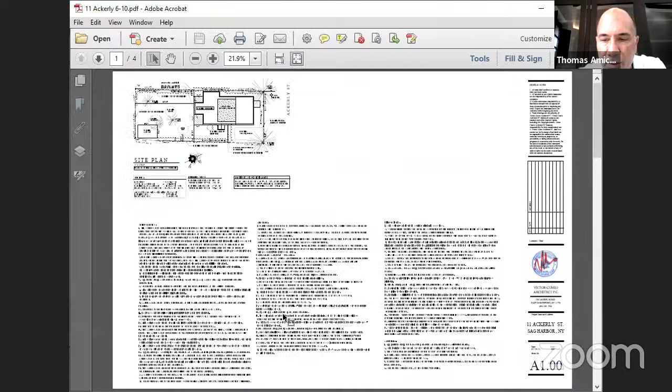There was a site visit last week on Thursday. I think the discussion was about windows. Unfortunately, I could not be there. And we submitted a window schedule, which I think is what that was. Jack, let's see, am I seeing the windows, the actual schedule of windows there?

Can we go through these elevations and just point to us which windows are staying, which are removed, for the record? Sure, so let's start in the front. So if we go to the proposed south elevation, which on this slide is the lower right-hand corner, those 4 windows are staying. They'll be refurbished and staying. And the door also will be refurbished and staying.

If we go to the left, to the north elevation, these are all new, actually. These 3 — the one at the top is part of the dormer, so that doesn't exist at all at this time. The one in the back, the sliding door here — oh, I'm sorry, that's actually Carrie's cursor — is a new door that is moved from where it currently is now. And then the one to the side, to the left side, is also a new window.

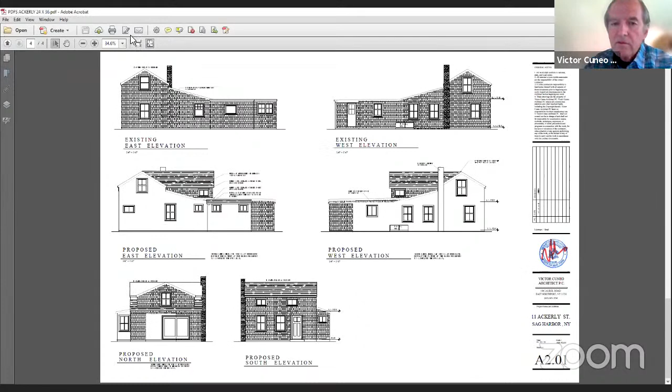Yeah Victor, could you run through that, because you would know better than I, the technicality of it, as far as what they are. Well, it's on the schedule there. Where's the list, can we see it? It's on the floor plan, it's got a list of each window.

So which ones are divided lights? Are they simulated divided lights? What kind of windows are they? They were going to be simulated divided lights with the grill work. They have it so you can put it on the outside and inside of the window. So it looks real, but it's not a real divided light.

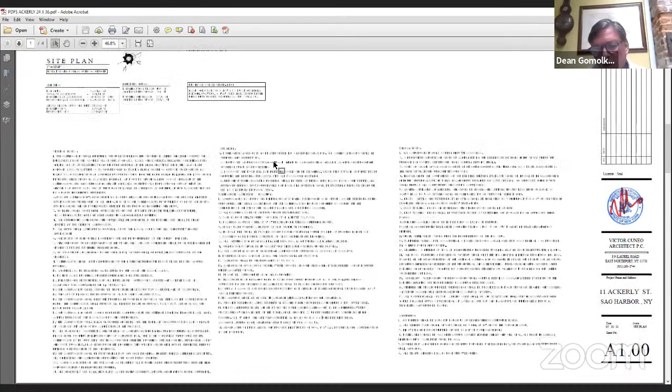And these windows are situated on the property where they're basically behind vegetation and hidden from view, in the back and from the sides, so you can't see anything.

Can we see the site plan, please? Can you just run us through your site plan? Yes. Are you going to bring it up? I'm trying, these are my limitations on the computer, I apologize.

Site plan, all right, we'll do this. I'll have to get back to this, share screen. I apologize, okay, so share screen. Pretty much remaining as is, isn't it, Tom? Yeah it is, but I just want to pull it up so they can see it.

But the thing we were talking about, Vic, is in the... oh, can you all see that? Did I do that properly? Or probably not. No. Of course not. What's that? Did I do it? There it is. Oh, okay, thank you.

New skills. So if you look, Vic, what we're talking about, the top right corner, this existing conifer, as I just mentioned, it's actually growing onto the house, and it's also growing on top of the gas line. We didn't put it in, we were going to leave it, but we didn't put it to take it down.

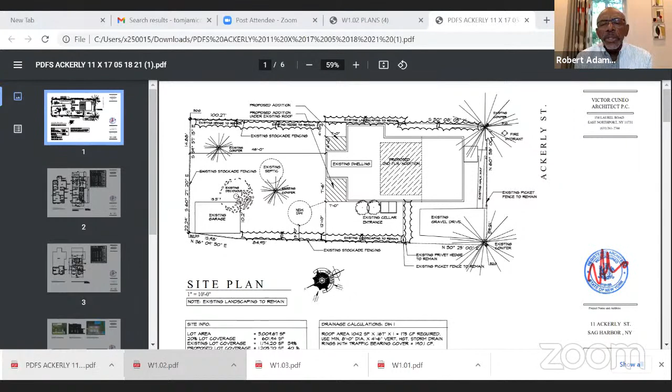Bob, is that door staying? The front door on that prop? Yes, so we'd be in the same place and it'll be refurbished. Okay, fine, thank you, great.

Is there a motion to approve 11 Ackerley as submitted, just the architecture only? I'll make that motion. I'll second that motion. All in favor? Aye. Opposed? Great, thank you very much.

So that was Judith and Brian. Thank you, thank you very much.

Dean, Brian DeSesa's here, so you want to do 14 Vitale. Great, okay, 14 Vitale, please.

Good afternoon, members of the board. My apologies, my calendar still went for 5. I'm Brian DeSesa, attorney for the applicant. We're back here for 14 Vitale Silly.

We were here last meeting where the board approved the house. We had some specifics with respect to landscaping we were looking for, so if I could screen share, I'd like to bring some of those up now. Go ahead, thank you.

What you're seeing on the computer screen right now is the materials designed by Ed Hollander and team. We have a rendering of what the edge of the pool and pool fencing would look like facing toward the water. This is not on the site, but a comparable site which matches the drawings of a similar installation that Mr. Hollander did.

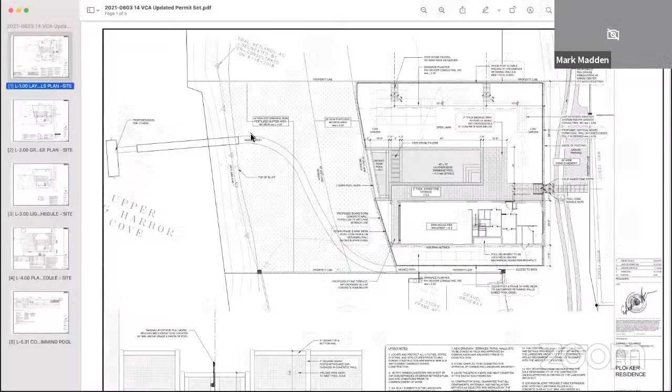And let me go back to the site plan. Hold on, one moment, sorry. We're back on the site plan.

So this is that pool, this is that wall where they would have fencing and deck area. These would be the walls. This would be the sandstone, the gray Madras stones, which would be stepping stones and stairs, which would complement the house. They did add some spot elevations that the terrace, the pool, top of wall would all be at elevation 10. I'm happy to answer any other questions that the board may have.

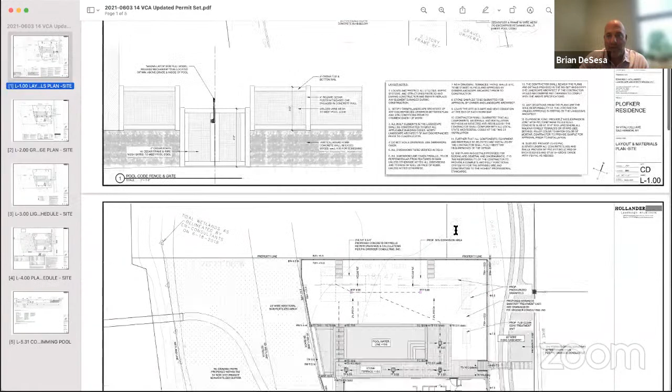Did I see a lighting plan on this one? I'm sorry, I don't believe there's a lighting plan for the house. Is that what we're missing? Is that landscape lighting? Let me just see - yes. Honestly, the lighting notes were on this schedule that I have up on the screen now. Someone really should walk us through the lighting. I'd like to separate the lighting plan and have a landscape representative walk us through the light plan on this, if you don't mind.

That's fine. Could we move forward on the landscape approval, and I would have someone from Mr. Hollander's office here for the landscape lighting specifically? That'd be great. We would like to know what the neighbors got, the impact of this light. I'm sure it's wonderful, but this is coming up a lot now, and it's very important that in these public hearings, everyone knows what's going on, and I would explain it in detail. Happy to make Mr. Hollander or someone from his team available to walk through the lighting plan.

So board members, I asked for some of these things, in particular the grading plan, the heights of the wall, details of the wall. We have some retaining wall details and things of that nature. I think the planting is beautiful - we've got a lot of indigenous things happening, and I think it's spectacular, really. So any comments from the board regarding the landscaping? I think the landscaping, they did a terrific job.

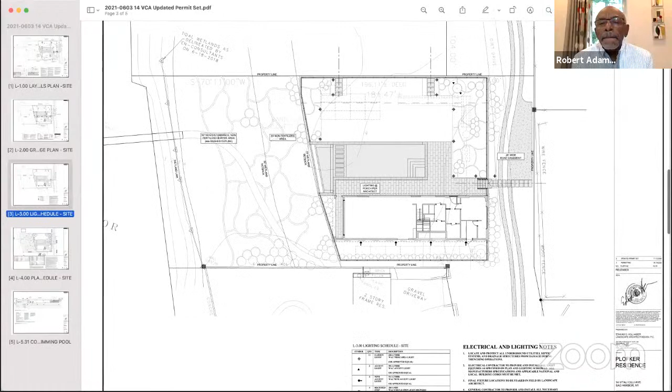Bethany, I would agree. Judith, if you like it, I like it. You can't go wrong with a lot of native plant material. Yeah, I sort of love that sense of place.

So, Mr. DeSesa, if we could just follow up with the lighting and educate the public and us on what's going on with the light intrusion on this site. I can have them do that. I do have the lighting plan, but they would know about light protrusion a little more, so I'm happy to have them at the next meeting, because we might say okay to this design or another.

So are we able to move forward on the landscaping and then separate out the lighting to have them at the next meeting? Sure, that'd be great. I make a motion to approve the landscape plans excluding the landscape lighting sheet from 14 Vitale Silly Avenue. Is there a second?

I'll second. All in favor? Aye. Opposed? Great, thank you. So that was myself and Bethany.

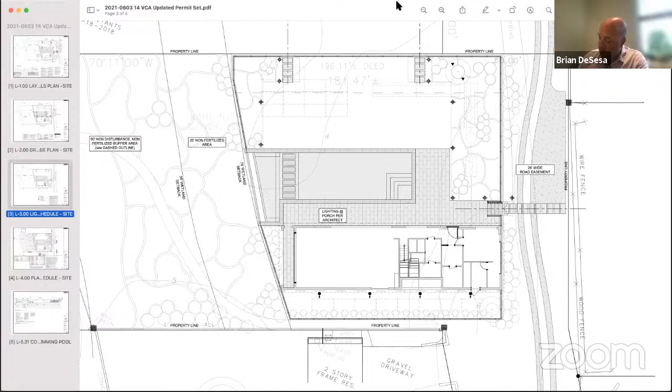Have a good night, everybody. There you go, thank you, Bethany. Right, yeah. Did you say something, Carrie? No, I just said thank you, Bethany.

Okay, great. 14 Rogers Street, please. Yes, good evening, members of the board. Alex Stone here with my wife, Kate, owners of 14 Rogers Street.

Carrie, can I share my screen please? Yes, you can. Is Rick here too? I believe he is. Okay, are you able to see my screen? Yes, we can. Okay, so to remind the board of the house we're talking about, it's this one here on Rogers Street.

Last meeting we spent a bunch of time talking about how I had gone with the board's recommendations to leave the front door in the position it is currently, and the windows and the entire front of the house as it is currently. We also agreed to do the foundation in brick as per Mr. Studenroth's suggestion.

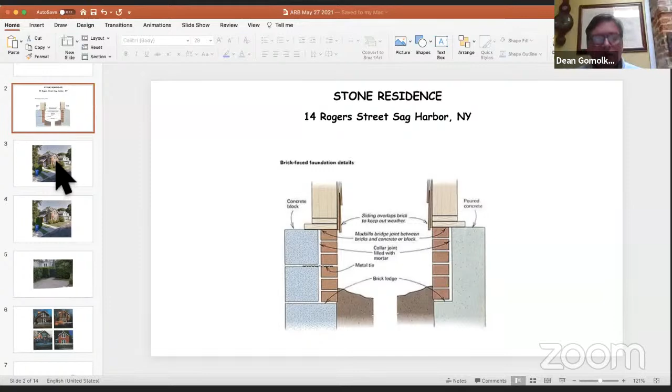Sure. The front of the house, everything you can see from the street, is going to remain as it looks here. We did get approval from the ZBA to lift the house 24 inches, and we're going to be enclosing the porches that are on the side and back of the house.

You can't really see much back there. This is really the only angle from the street where you can see even just a sliver of those back porches. I did a poor photoshopping job here showing where our hedge is going to go at the back of the parking court. Our parking court will have a hedge and a little gate like that eventually, so you won't really see much in the back.

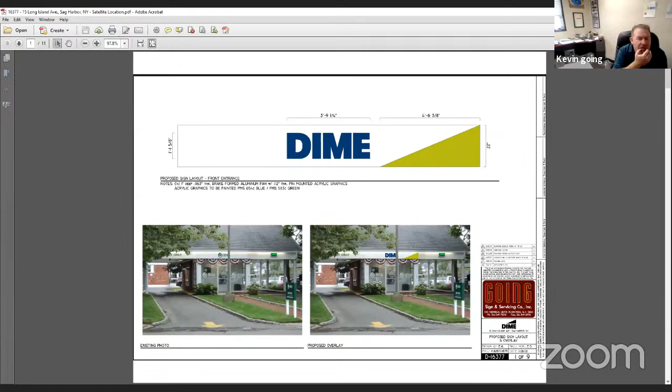There, so that's it, go back. There it goes. That was a minute ago, right there. There you go.

So it's going to be this, but it's the exact same size, correct? Same size, we're not changing the size at all.

Is there a motion to approve 15 Long Island Avenue as submitted tonight? I approve 15 Long Island Avenue as submitted tonight. I need a second. I'll second that. So that's Bob and myself, all in favor? Aye. Opposed? Great, thank you, have a great night.

Okay, 11 Carver Street please. 11 Carver? Yes, great. State your name for the record and tell us about your project.

Mark, are you there, can you hear me? Hi Mark, hi, sorry about that. Yes, we're adding a pool and pool house garage on the back to 11 Carver. This is our third time here.

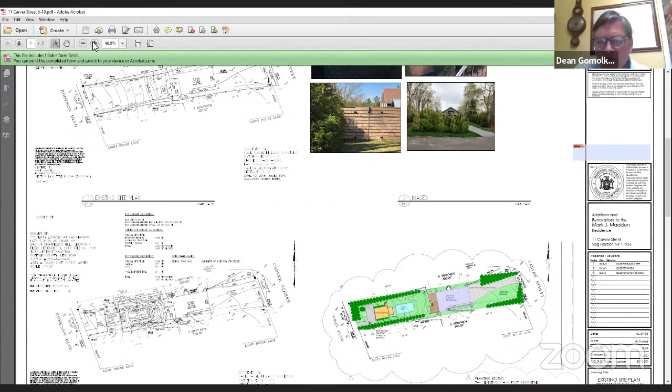I'm bringing it up right now. There you go, do you see it? Yeah, can you zoom in so we can see what's going on? I would love to. There you go. Thanks, Carrie. You're welcome.

So if you can just enlighten us and explain, we were asking about, is there a plant schedule? Yeah, it's provided, everything, all the perimeters are already in place. All the perimeter plants are already in place. It was along the garage.

We asked for you to call out what plants those were here. I see green, and then we put in, somewhere he put in, we were going to put in 4-foot boxwoods. Yeah, they're on the bottom, 15 on each side, right here, it's proposed planting legend. Existing here and existing here, and then proposed 4-foot boxwood.

And then the grading with all the water going into the pool, is there, did you, did someone take that on and put something in? Right here I believe he put, and I'm sorry because I'm pinch hitting for my architect, but he put in something right here, I believe.

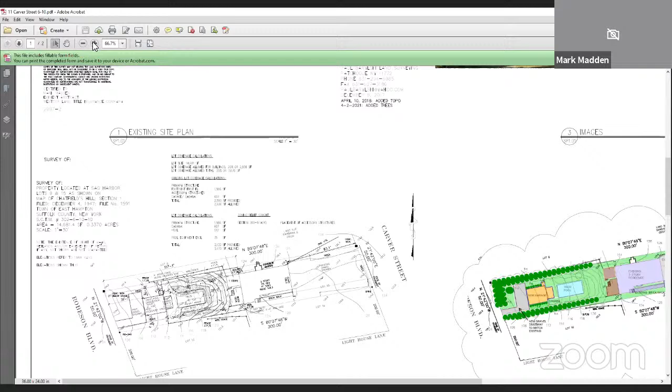Carrie, is that what we did, to put in a drain? To catch the runoff, I'm trying to zoom in for you to see it. Sorry. If you see right here, I believe it says new dry well. Yeah, yeah, correct, right there.

Okay, I'll make a comment that the building inspector will do this anyway. We'll make sure that these takeoffs all correspond with what's required to make this grading work. I will make a comment on the application that the building inspector will review your calculations.

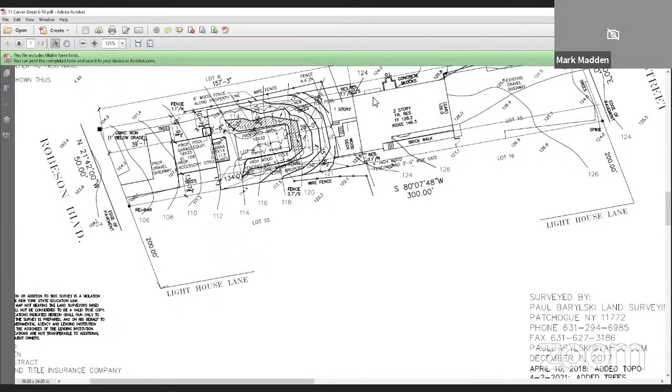Okay, perfect, completeness, thank you. Is there a motion to approve 11 Carver Street as submitted? I'll make that motion. Is there a second? Second. All in favor? Aye. That's myself and Judith, with the comment that the grading and drainage will be reviewed by the building inspector.

Thank you, folks. Thank you. Good night, Mark. Good night.

6 Hampton Street. 46 Hampton Street.

So, Elizabeth, I do not see her. Okay, so this is a beautiful old house, has a lot of detailing like the wharf shop in town. So if we could probably draft up a resolution between you and Zach on how to repair the woodworking on that, and then we could probably vote on that next week.

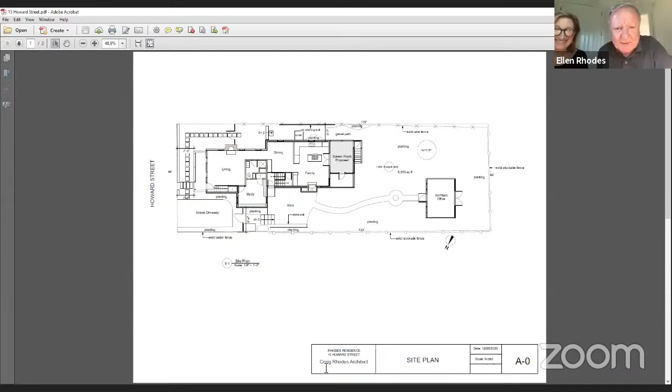I'm Craig Rhodes, and this is my wife, Ellen. We've lived in the house since 1993, and we've put a couple of additions on it and gone through all the approvals and all that.

We have this deck, and we've always wanted to be able to sit out there in the summer evenings, and we love the idea of a screen porch. So it really seemed to be a logical addition to the back of the house. If you've been to the property, you'd realize that you can't see it from any other property. It's pretty much secluded back there, and it's just a modest size porch, and we would love to be able to do it. I did trespass today, I thought it was quite beautiful back there.

Thanks. Any comments from the board? Bethany, I think it's very appropriate and I'm good with it. Bob, I think it's a great idea. Judith, I think it's wonderful. Is there a motion to approve 15 Howard Street as presented?

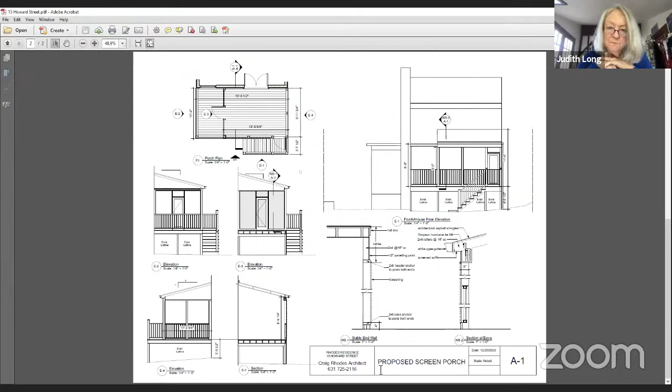I'll make that motion. Is there a second? I'll make that second. That's Judith and myself. All in favor? Aye. Opposed? All right.

155 Main Street, please. Ryland's here. Hi, Ryland Hilbert, just the turn it off. Okay, new occupant of 155 Main Street.

Gary. Did we lose our applicant? No, I'm still here. There you are.

Okay, tell us what you're proposing, please.

I'm proposing replacing the former Corcoran signage with 3 new signs. If you scroll up, there was formerly a larger sign, that's the current pin lettering. It's going to be metal pin lettering with my logo. There was an awning to the left of the building that was taken down by the landlord, and there used to be a Corcoran logo there. For the front, I'm going to be putting the pin lettering in the metal.

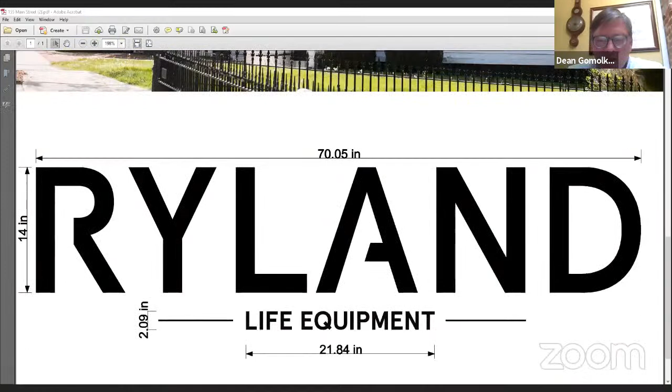Okay, so we're just talking about proposed stuff at the moment. So there's this one, and where the sign is proposed to be in the lawn - can we see that? It's just down a little bit more. Or is it in a different file, Carrie? Yeah, let me grab it. Okay, that was on one thread.

What is a life equipment? Get a free commercial here. We prepare men for everything that life throws at them. It's our little slogan.

So the lawn one, it's still actually there, the Corcoran sign - I guess the landlord just took down the letters. It was much bigger, I'd have to measure, I think it was like 6 feet by 3 or 4 feet. We're going to reduce it to 3 feet by 3 feet square, which actually my current store in the background of the photo, once it's pulled up, you can see is the same spec, like 36 by 36.

I'm trying to pull it up - when you sent it to me back in the beginning of May, it's expired. I'm just going to re-forward it to you. I don't know if I could share it, I'm on my iPad. Just resend it, re-forward me the thing someone sent yesterday. Hold on, oh there we go, found it, you got it.

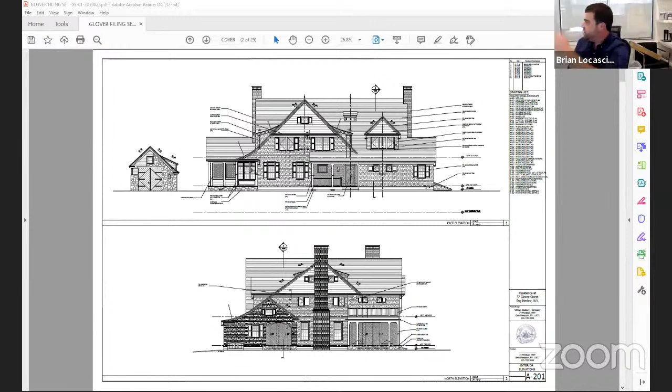You come in. Hold on, let me just try this again here. Sometimes it gets frozen. Are you looking at A202 now? Yes, yes. Okay, all right. So,

All right, so you've only seen really the front elevations. So the door on the rear, this is the second story deck. This is the copper roofing, the stone foundation. And then here is the pool house outdoor shower, which contain the stones, cedar siding.

And then the garage, which is part stone, part cedar. This is kind of give you an image of what it would look like. Garage door. This will be the color of the cedar shingles.

This is the simply white for the proposed trim and cedar lap siding. This is the anchor gray, which we're proposing for the shutters and the front Dutch door. And this is the horizon, which will be for the window sashes.

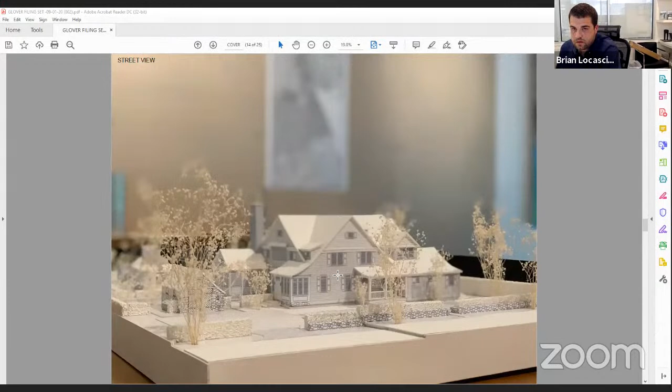Again, just another idea of what it will look like. And here's a 3D model to give you an idea of how it would look overall. The house, garage, pool house. Again, from the street. This would be from the north view.

And do you have any information regarding houses of a similar square footage in the area? I do not on hand, but I can certainly get that.

And there are several quite large houses on Glover Street. I don't think this is by any means out of context. It's on Glover. We'd like that to be fleshed out on a street plan showing some comparable sizes.

I was making notes. Now, do you have some quick detail sheets to run through for us? And then I'll just get some general comments. Yeah, do you want to turn to landscape, or do you want detail sheets for the structure? Yeah, for the structure. Okay.

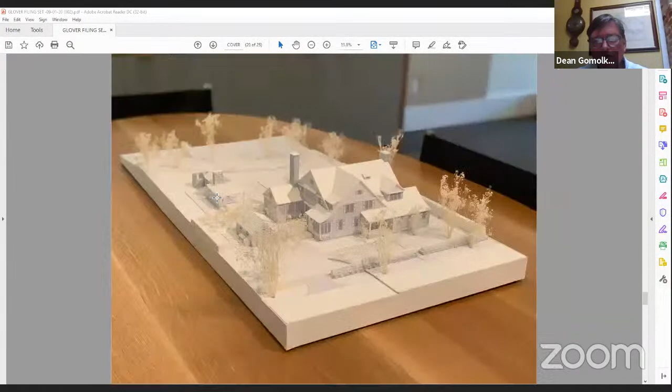So I have a window schedule, all Marvin windows. I don't know if you can see. Do you have window details, soffit details, eave detail, chimney detail, something?

So we'll just start with the magnitude of this structure, and we do have, we provided a full building department plan set. I can pull that up.

At the end of the day, we're going to have to go—if we vote tonight, we're voting to go to a public hearing, correct? Correct. So,

This would be great to get some of that context from those drawings and discuss it with the board members, but just from what we were looking at now, we can get a good sense of how the board is feeling towards the massing of this structure. We have Bill Beaton, the architect here. He might be able to answer a lot of those questions directly, if you do want to direct some questions to flush some of that out now.

I believe he is here and was prepared to assist in the presentation tonight. Great. Judith, how do you feel about, on the whole, the general direction of the style of architecture here and the size of the massing? As far as the style goes, I think it's fine, but I do have some problems with the size and the massing.

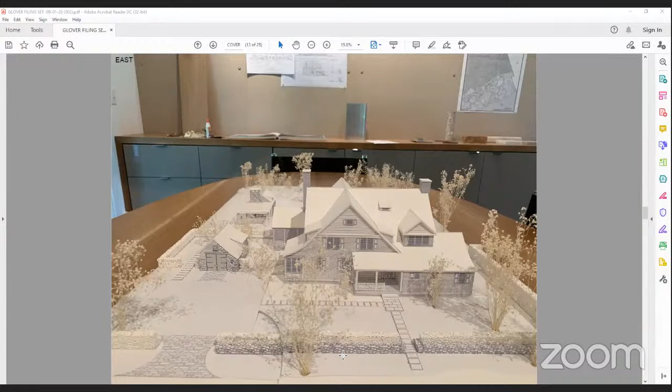And so it just seems like it belongs in another state, perhaps, where there are lots of stones. So I'm a little bothered by the streetscape because this will be so much bigger than its neighbors. And the other thing I'd say is all this stonework, not only on the house, but I think I see a very large stone wall.

Noted. Bethany? I think it's a handsome design. I really like the house. And I would be curious about the houses around it, you know, the sizes.

Because I really do like it, and I actually like the stone on the pool house. When I looked at what we're looking at right now, I kind of had that feeling about the stone wall, like you, Judith. But overall, I think it's quite nice looking.

To Judith's point about the stone, there are examples of walls that incorporate old ballast stones from all over the place. But I think, to her point, the whole facade of that garage looks like it's from somewhere else. So I think you could probably crank back that detail a bit to work with the sense of Sag Harbor, since it feels more like upstate New York or Maine. Val Florio?

Val? Well, I think it's interesting because a historian might say this house is sort of a change in direction from being non-historic, so it won't get confused with other houses on the street.

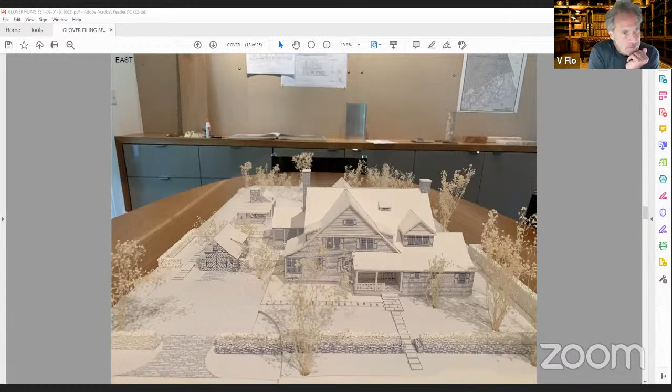Maybe, I'm not sure if there's a rendering or something, but as it relates to the streetscape, it would be helpful to see how it works with the other two houses side by side.

Bob Adams? I think it's rather large for Sag Harbor, and I agree with what Val just said.

I think a rendering would really do this justice, and to help us work through the square footage of this house and its size, we're going to need an aerial plan showing the different houses in the vicinity and their square footage, and how it compares to this one. And then, it's super important to understand how this site is being manipulated grade-wise, and why there are walls, and how the elevations are working.

And very importantly, what's going on with this is another plan with a lot of landscape lighting. I'd like to know what the wattages are and what the concept is with the lighting. A lighting plan was presented with the...

Yeah, I'd like someone to walk us through and say why they're using so many lights on this site. I'd like that to be out in the open, and explain what's going on with the walls, the elevations of this property, why it's being raised, and we need someone to walk us through the landscape.

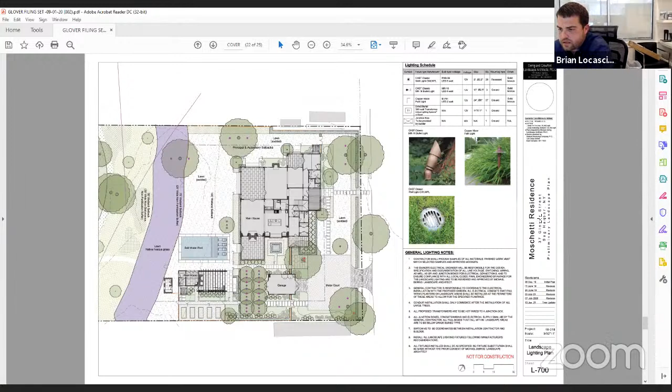So to move this forward, I think someone from the site team needs to be really clear and ready to make adjustments at the public hearing, possibly regarding how much light is being blasted on the site, how the grades are being manipulated, and how it's going to look. And that wall - it's a simple thing, we just need to know what's happening here.

And I'm happy to vote for a public hearing, but I think you're getting a positive reaction, with the sticking point being the overuse of the stone cladding and the size of this structure. And it's a matter of convincing us that the neighboring properties are of a similar size in some way, and how this is working into the street.

So with that, board, would you be okay if I go to a vote to set a public hearing for this project? And it would be very important at the public hearing that the architect walks us through these simple things - the details for the chimneys, what's going on around the windows, the doors, the soffit - just some stuff that, since we're here as the aesthetic element, we just need to be provided with that information.

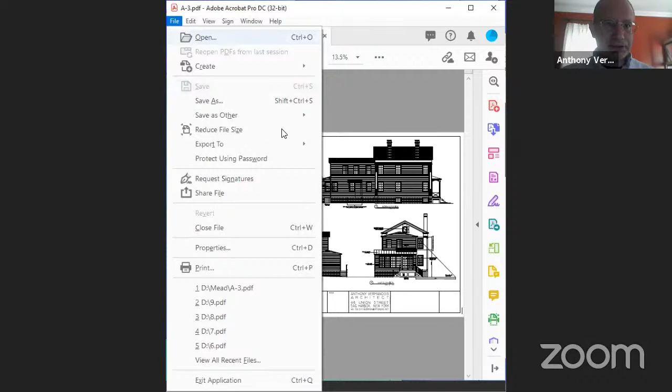Okay, I don't know if you can see that here. Let's try to get this. Oh yeah, I can see. The right way. Well, I can see the door, like you said. Oh no, maybe that's how it's going to look. So what we have here is, this here is the existing side. Let me try to zoom in here.

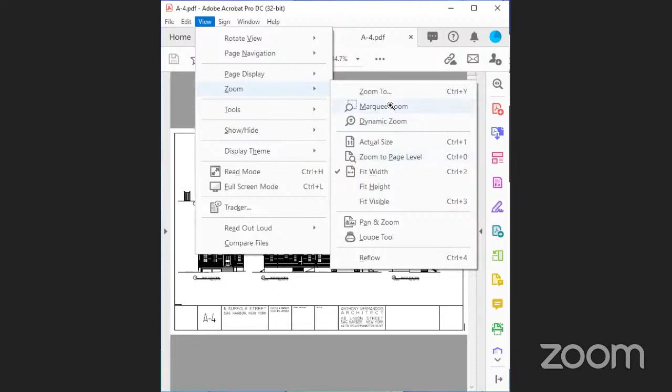View. Go to marquee, I think. Yeah, yeah, and then you can. There we go, there you go. Thanks, okay, that should be a little clearer.

All right, so here, here you've got the existing side. You can see how there's these two roofs that are different heights. There's this side door, this stoop, and this little shed thingy-majig. So what we're doing is just kind of regularizing this. This door goes away, the shed thing goes away, the stoop goes away. Two new windows here, a new little basement entry there, and then this roof just becomes evened out.

And then you can see on the rear elevation, this is the existing, so this kind of funny change in height here. This is that sort of funny shed thingamajig, the existing stoop there that we're taking away. So we're just regularizing this, so it'll just be one roof line and a stoop going down.

It's good, yeah, all makes sense. We're picking up the existing details and just implementing them around. This is a very nice application.

Comments, Zach? Oh, I think it's perfectly fine. All the real work is on the back, which is all newer construction anyway, and it's obviously out of sight from the street. Judith? Yes, it's an improvement by far. Bob? It looks good to me, it's fine. Val? Yeah, very nice. And Bethany? I agree. Okay, great, I think that this is a great addition. I mean, this is working with the existing architecture.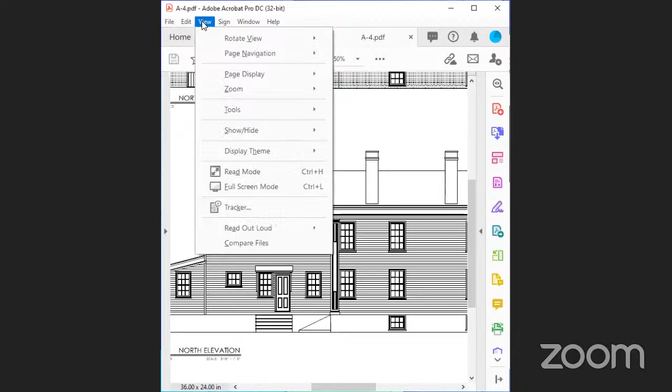So, if you may recall, about I think this was back in December, we did a discussion item for this project. I think things just got kind of caught up with some of the upheavals in the building department and stuff, so we had to kind of update everything to meet the new checklist and whatnot. And then we finally got to have yesterday a site visit with me and Zach over at the property, so he's now seen it.

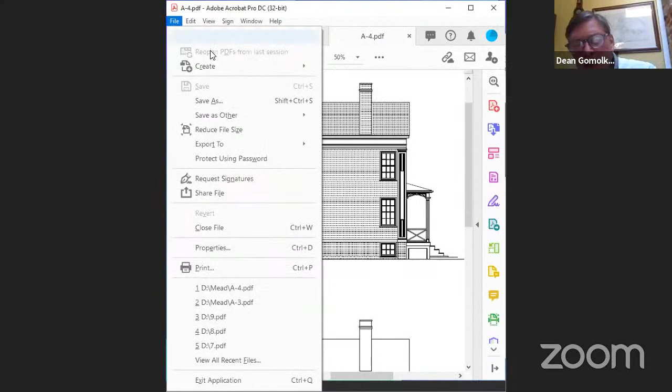So Anthony, can we get the right image up? And Zach, I'm gonna try to do that right now. Working on it. Zach, can you tell us about this site?

Well, it's a lovely small scaled craftsman type cottage. It's one story. It's a little unusual, it's only four bays wide, which will come up later in the discussion. Seems to be pretty much intact as built, and this is an application to enlarge it to the rear.

And Anthony can speak for himself, but I think that what he's going to present will show that he's scaling that addition appropriately. It steps down from the existing house and it steps in on either side. So I think he's done a good job. As I said, the house is small in scale to begin with, so that's always a challenge, but I think he's done a good job with that.

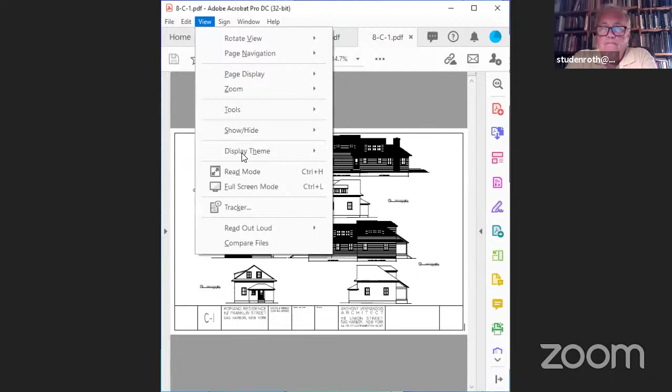It's interesting. You see all the old windows are kind of intact. As far as I recall, virtually all of the existing house is going to remain pretty much as is. Some very minimal changes to the existing house.

A couple of things, and this is all stuff Zach and I discussed. The existing foundation is kind of a mess. I think what happened was originally the whole basement was just a crawl space, then at some point somebody dug out a part of the basement to get headroom for newer mechanical equipment. You can see the formwork, a very old-fashioned kind of formwork. So it's a poured foundation, not a block foundation like you usually see, but a very primitive form of formwork. So the idea is we want to lift the house and put an entirely new foundation in there.

You'll see in the drawing set that's all fully called out and detailed with dimensions. The house won't be any taller than it is now. That's noted on the site plan and survey - the first floor height will be the same, and the existing ridge height will be the same. So that's probably the biggest intervention to the existing part of the house.

The other intervention to the existing house that Zach and I talked about - Zach was a little skeptical at first, but when he saw the logic of it, I hope it made more sense. In the existing front facade, the front door is here and there's a window here. What we want to do is flip-flop the two, door here and window here. This will still be the same original door and window, just literally flipped. Usually when people do this, they're dealing with a 3-bay or 5-bay house and it messes up the symmetry. But in this case it's a 4-bay house, so it's not really changing the symmetry or aesthetic at all. I wanted to bring that to your attention.

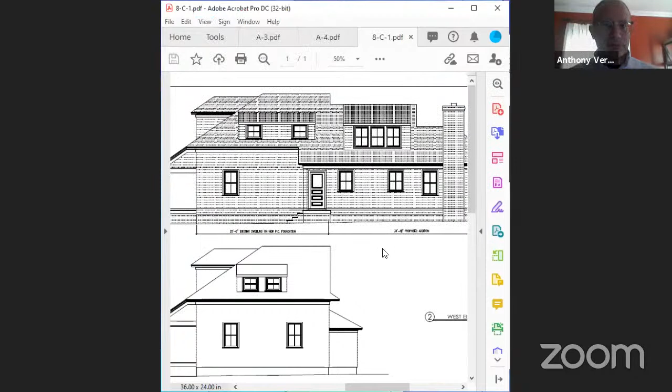Great, thank you. Okay, and then just so you can see, there are compared elevations that we like to see. I think the most telling one is... I can zoom in here but I can't seem to zoom out. Give me a moment. Let's see if this one works. There we go, okay, so I think the most telling elevation is going to be this one.

So here's the existing house, here's the proposed house. You can see we're stepping down 2 feet here, stepping down 4 feet here to this 1-story in the back. We're adding this dormer here, elongated a little bit - this is an additional dormer picking up on the same aesthetic of the existing dormer, but just a little taller to get egress windows in there. A little side porch here, double hung 2/2 windows to match the existing.

Alright, you had asked about the detailing, so I'll go into that. Let me ask a quick question about the chimney first - it just seems really large to me, Zach. What are you thinking about it? Especially when I look at the front view, part of it - it's like it's detached from the house because...

Yeah, actually, we looked at the house and the details - I don't recall seeing that. Is that an outdoor chimney? It protrudes from the house. That's something we could bring into flush with the wall if that would be better. Yeah, I'm glad you picked up on that - it does look, it's more.

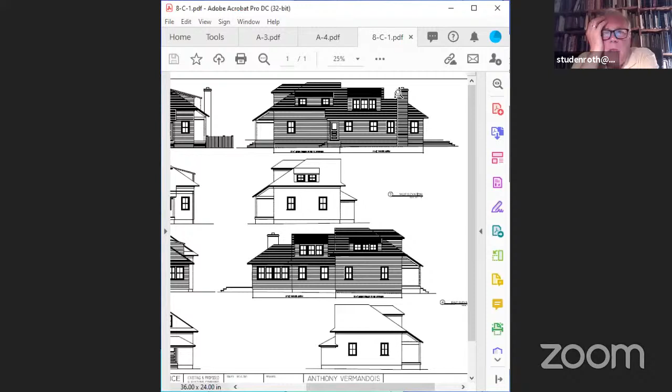I mean, it's like a tower instead of a chimney. Yeah, we could pull that in so it's flush with the outside wall. Before you do that, could you put a cricket, you know, just do a reverse gable so you don't have to pull it inside? Or is it better to sink that chimney inside? I think I'd rather just sink it, because the chimney is actually not that wide overall. If we start putting an angle in there, it's just going to start looking a little weird. I'll play around with it a little bit, but pulling it in would probably be the path of least resistance here. All right, good, yeah, that's good.

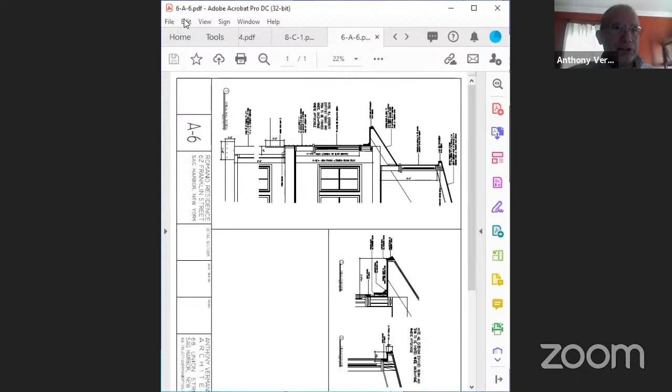Okay, file, open. Give me a second here. I think I have the details on A6, so hopefully. Yeah, okay, perfect. Let me rotate. You're getting good at this, Anthony. He is, I know. Actually, yeah, okay, so you'll see here I've got my wall section, so you can see how the foundation is working here.

We're going to step in the 1-inch step that Zach likes with the 3/4 split brick veneer on it. This is through the new part of the house, so that's why it's showing everything new there. Give me one second.

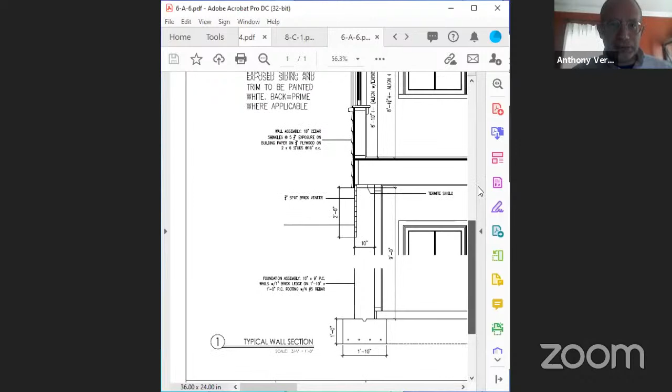There we go. All right, so yeah, so you got your floor framing. Basically the windows, as we talked about, 2/2 windows to match the existing. The nice, really deep soffit fascia detail will match the existing. As Zach and I noticed, the house doesn't have any gutters. It's basically water is handled by just the depth of the overhang, so that'll be a great detail retained. Siding, same shingle siding that's there now. Everything's just going to be painted white.

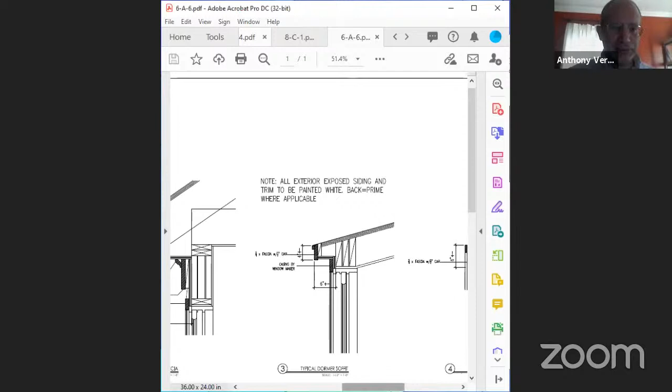Trim also will be white. A little bit of a more modest overhang for the dormers, which picks up on the existing dormer detail. I think I do have a detail of that somewhere. Yeah, here it is. So it's just 6 inches deep for the dormer detail. The window gets pushed up pretty close to the fascia, but that's the way the existing dormer is now. Here's a blow-up of that nice big deep main fascia.

What is the roof material? I'm sorry, what is the roof material? Cedar shingles.

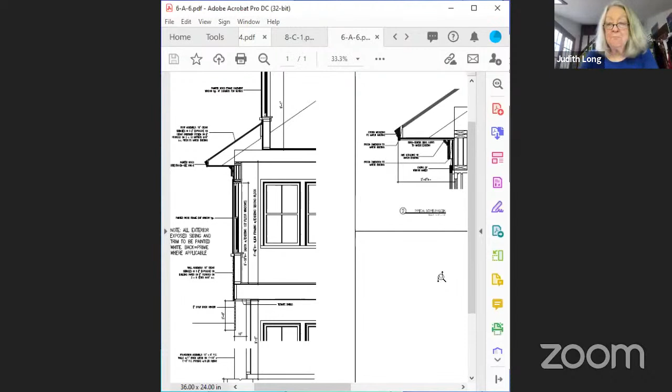Val, do you have comments? No, it's a nice looking addition, nice and simple, and scale looks great. Bethany? I like the plan very much. Bob? I like the plan myself. Looks good. Judith? I like it too. I'm curious why you're flipping the door and the window on the front. The reasoning is just interior layout. We're actually moving the bedroom to the front, the first floor bedroom to the front, so the door would have you walk right into the bedroom. So that is just so you walk into a hallway instead, just playing around with the floor layout. That was really the only way we could position the bedroom. Yeah, I think it's a nice little arts and crafts, and you're doing a nice enlargement of it. From the street, when I was there today, you can imagine with this addition, you would still maintain the original integrity of this house and what it looked like when it was built. So I think you did a great job with this.

Mhm, so can we move to the site? Sure. View file, open. This one.

You know what, this one is almost, it's probably just as well to leave it in its current configuration. So you can see here is the square of the existing house. Widen the driveway slightly to get 3 cars in there. That's something the ZBA wanted. There's our side entrance, this is the addition here. We do have our swimming pool pushed all the way in the back there. It's a pretty small pool, 11 by 19 feet. Pool equipment there, some shrubbery around the pool equipment. Lot coverage is a little tight here, so we're really just going to have a gravel patio, pool coping, and pool equipment, and that's it.

We can, at a later point, we might want to see if we want to deal with going for a variance for lot coverage, but we wanted to at least get started with something that works totally with conforming. There's actually some existing privet along the front perimeter, pretty high stockade fence along this side of the property. I think, yeah, actually the stockade fences run across the whole property, if I remember correctly. And then in the back here around the swimming pool, just some higher green giants.

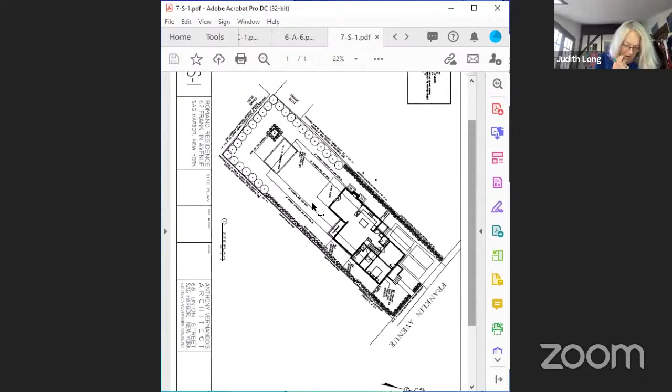Is there a motion to approve 62 Franklin as presented tonight? I'll make that. I'll second. That's Bethany and Judith. All in favor? Aye. Aye. Opposed? Great, thank you very much.

Thank you. And now you're going to go back to 224 Jermain Avenue, please.

Good evening, my name's Ihor Boyson. I'm a structural engineer with Trinity Solar. I also have Corey Corcoran here, an engineering specialist and design layout person on solar systems attending. This is, of course, for 224 Jermain. I believe we have a resubmission here to correct a deficiency we had with panels being seen on a previous submission.

So this is in the historic district, so we really need to make sure these things are not seen from a neighbor or the street. So if you have some sort of a site plan that depicts that, that would be great.

Ian, you guys went out for a site visit on this to see. Right, I was out there with Bethany, and we could not imagine how they could camouflage these solar panels, but I'm all ears.

Is there a site plan that you can show us, showing the street, the house, the orientation of the roof? Let me ask, do you have drawings available? There they are. Aries, jumping on it now. There you go. Okay, so where is the street?

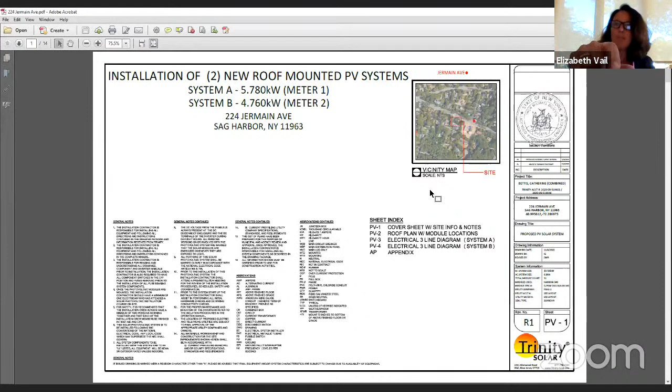So, just to clarify, you shouldn't be able to see the solar panel from a neighboring yard, whether standing in the front or back. I was there with another member, and we imagined where these would be placed and determined we could see them from the neighboring property, coming down Jermain.

We felt as though we would see it. We have nothing here that we can stamp approved tonight, so if you could come back with some more information, that would be great.

Thank you very much, we will do that. I make a motion to table 224 Jermain Avenue. Is there a second? I second, that's myself and Bob. All in favor? Aye. Opposed? Great.

So, 132 Jermain Avenue. Zach, this was a discussion at the last meeting, and although many of us liked it, we were concerned about losing too much of the original character of the structure, and we were hoping you could opine on that.

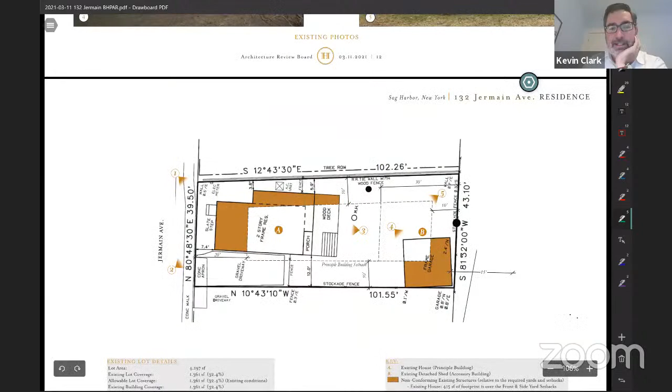Oh, I don't hear it. He's frozen in time. The suspense is killing me. Me too, I thought the same thing. That was me that disappeared, sorry.

I question that hood that sits, the bracketed cover to the door. Can you hear me? Yes, okay good. So the facade is quite plain, I'm not questioning the style, I think stylistically it's appropriate, but I think it's a little too decorative. It would help the case here if there were something comparable in the village. I'd say it's 50-50.

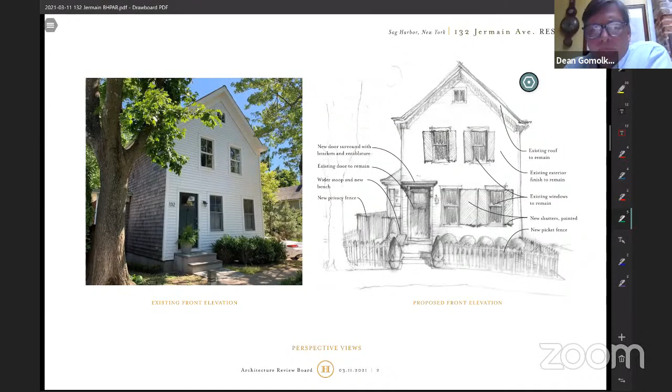Can we go around the back? We didn't have issues, we just wanted you to take a second look.

So here on the back, essentially taking the current wood deck and enclosing it with a sunroom, almost a conservatory or greenhouse feel, with casement windows wrapping around. This house had clearly had an addition in the back, so we're adding to that. And then the wide stair is also looking at getting access to the basement level, which is maybe about 5.5 to almost 6 feet out of the ground on this side. Having that walkway down to the lower level is helpful here as well.

When we were there, the decking and the extrusion of that existing roof line - the rendering does not do it justice. It looks a lot bigger than what it actually would be. Cutting the stair in half is kind of romantic, kind of fun the way they've played with this. It's just unfortunate the rendering makes it look enormous. It exaggerates the scale of it. It's not nearly that big.

Really tiny. What's the square footage of that, Kevin? It's just a tiny thing - 10 by 12 by 13.

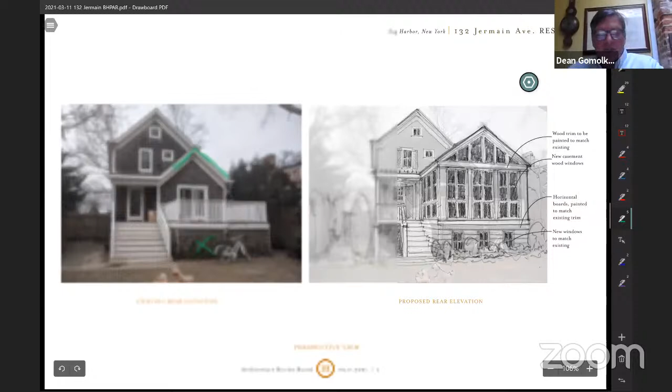We need to move along. I just want to flesh out these situations, and then you can come back with drawings and have a direction. So Zach, the other sticking point was the non-conforming historic barn in the back.

The way they are turning this into a studio, what are your concerns or comments architecturally?

He's frozen. We stumped him. I think he's really pondering it. We'll get there. I think he's gone. We waited this long.

Okay, so board, we went through this. We kind of liked the direction this applicant was going in regarding this project. It was just listening to Zach and giving the applicant the go ahead to flesh out the details for us. When I was on site with Bethany and we were talking to Zach, I think he did not have a problem with addressing the barn as a studio.

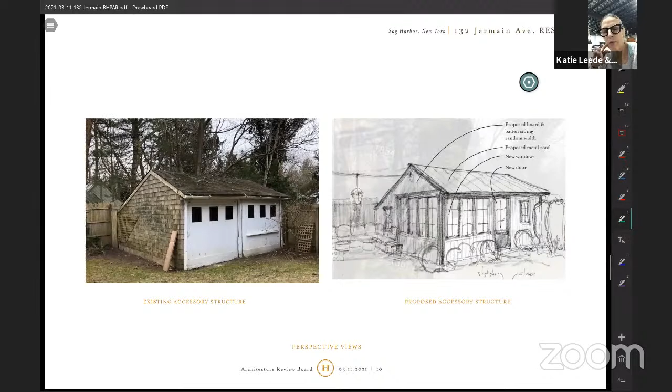Can I ask one question? Remember there was the issue of wanting to raise the back house a foot, because it doesn't have a foundation and we have a very tall family, so it's a practical issue. We are not changing the roof line. We'll get some documentation, but I think we're all good with your original proposal, and we will get it lifting, yeah, for her. We'll lift it like a foot, and we'll get documentation from Zach's comments on that back barn to you.

Zach, are you here? Quick question on the back building - they were raising it a foot and adding windows to make this a usable space. What are your comments? I think that's fine. I think the scale of it is such, it's quite low as it is. Raising it slightly to make it function is not a problem at all.

Are there any more comments from the board regarding this project? I have one question please. On the picture of the back of the house, there seems to be new - in the little porch, instead of a door, there's now a window that seems to have 12 panes, but all the other windows in the house are 2 over 2. So I'm just wondering about that 12 pane window.

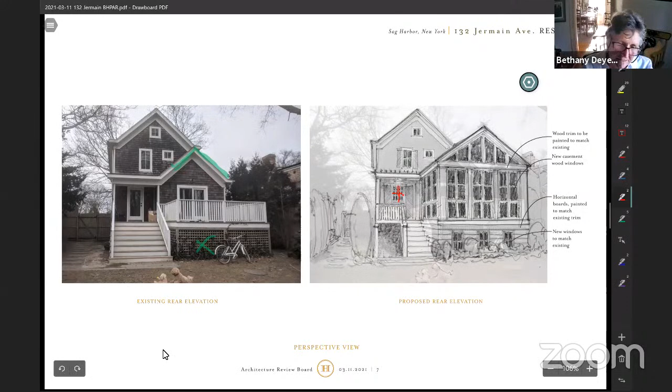Thank you. 55 John Street, please. Hello, I'm Christopher DiSunno, I'm the architect for the applicant. Hey Chris, what do you got?

Hi Dean, very small project here. We've got an existing house with a second floor master bathroom, and under the dormer of the bathroom, where the tub is, we'd like to extend an existing dormer so there's enough headroom for a shower. You're looking at the existing survey - the hatched area toward John Street is the expansion of the dormer. The dotted line to the left of that is the existing dormer.

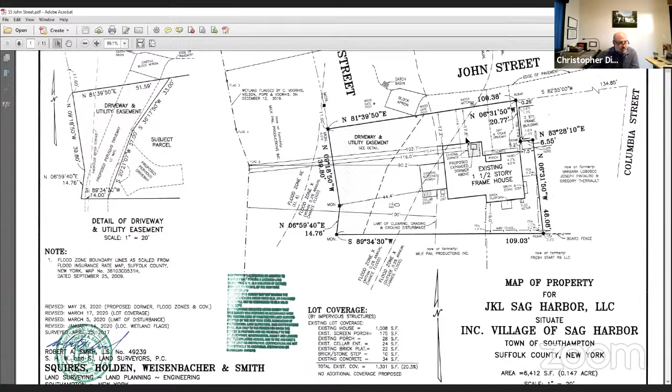And we submitted another sheet with a bunch of photographs. So right there, these are some quick drawings of the existing house showing the existing dormer and the expansion of the existing dormer. Zach, did you have a chance to go out there and check it out?

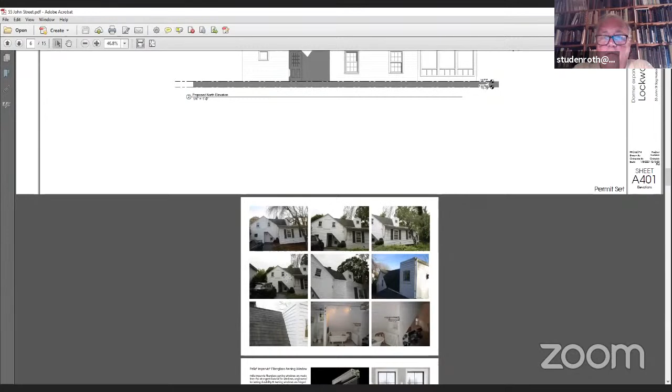Yeah, I did. I looked at the drawings first and then drove by, and I didn't actually expect this to be the front facade of the house, which it is. And I would only question - I wouldn't actually call what's existing a dormer. Somehow or other, it's a truncated second story that wraps the corner and doesn't get very far. I'm only mentioning that because I think extending it as proposed will improve the aesthetic of it.

By the way, this house is listed in the National Register form, but it is not a contributing resource in the district. The reason is, because there's another little historical building on the property, in the estimation of the surveyor it had been too altered formerly, so it lacked integrity to be included as a contributing structure. So there's an important distinction - in the district, but not a contributing building. So your discussion is really simply on the basis of aesthetics, not historical. Thank you very much. And room, Val Florio?

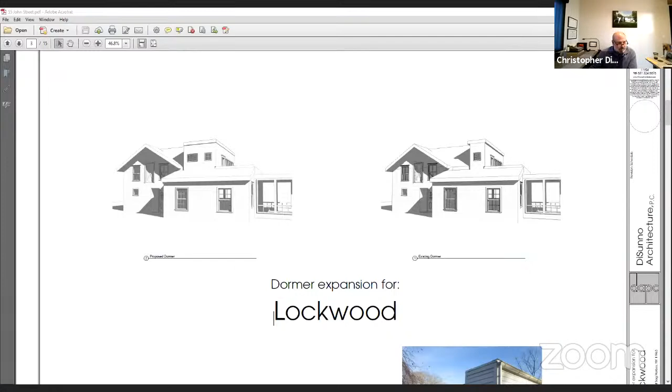Val. Sorry, if we could pan down to that image, the sheet with all the images, you can see the interior. You can see the bathtub. But we have to concentrate on the exterior. Val, what do you think? That's the roof, that's where the dormer is being popped up. Got it, I think it's a good improvement. The single wide dormer looks very peculiar, so adding some more girth to it is a great improvement, and this thing is motion worthy.

Bob Adams? I think it could be a better design, but all he wants to do is bump up and straighten out that bathroom. That dormer is out of proportion, or whatever Zach called it, it's a strange piece of architecture they got slapped on. Yes, it is.

Bethany? I'm in full support of extending it, and I think it'll be better. Judith? Yes, it'll be better. I drove by it today and I couldn't believe that thing sticking up out of the roof, and I had never noticed it in all these years. It's bizarre, but I think doubling it will make it look better.

So Chris, it sounds like you crushed it. Is there a motion to approve 55 John Street? Thank you very much. I'll make a motion to approve. Is there a second? I'll second. So it's Val and Bethany. All in favor? Aye. Opposed? Great, thank you very much.

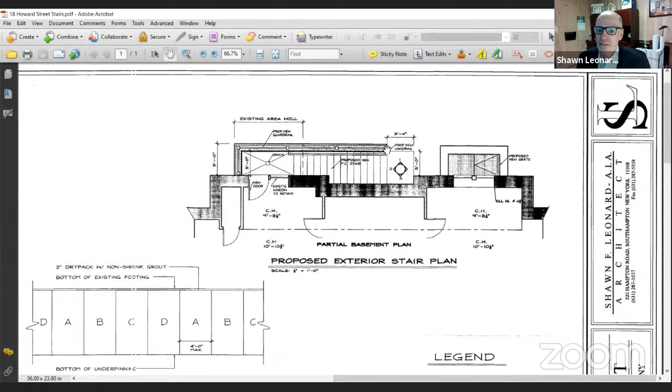And we're taking one of the two wells there, right here, and they want to actually make it so they can have stairs, so they can walk out from the basement up and out. So we're not making it go into the side yard any more than the window well currently does. We're just adding the stairs to run along the side of the house and putting a railing on top that'll be painted white.

Okay great, just run through the materials. Are you stuccoing the wall? Are you painting it? What is the wall? The walls that are underground will be all stuccoed, and the cap would actually be bluestone. It's currently bluestone up there now, so we're just going to continue with the bluestone cap on top, and the material of the railings will be a white painted railing.

Bethany? I'm fine with it. Judith? Seems fine. Val? Looks great. Bob? I'm fine, I think it's awesome. I'll make that motion to approve 18 Howard Street. Is there a second? I'll second. All in favor? Aye, aye. Opposed? That was myself and Val.

I will make the motion to open the public hearing for 10 Yale Road. Is there a second? I'll second. Okay, it's myself and Judith. All in favor? Aye, aye, aye. Okay, applicant, please state your name for the record and tell us what's going on.

Hi, Melissa Dedovich, Peconic Environmental Associates. I'm here on behalf of the Marsilli Bat Project. I'm also joined with representatives from Blaze Makoid Architecture, Elizabeth and Ryan, as well as Steve Naroda from Aris Design. I think what we're going to do is just represent what we presented last month. I think the board seemed very much in favor of this. Again, this is a waterfront lot with two front yards, waterfront, and then actually three front yards. It's kind of strange, and it's at the terminus of Yale Road. So I think what we'll do is, Elizabeth, if you could walk us through the plans again and we'll represent.

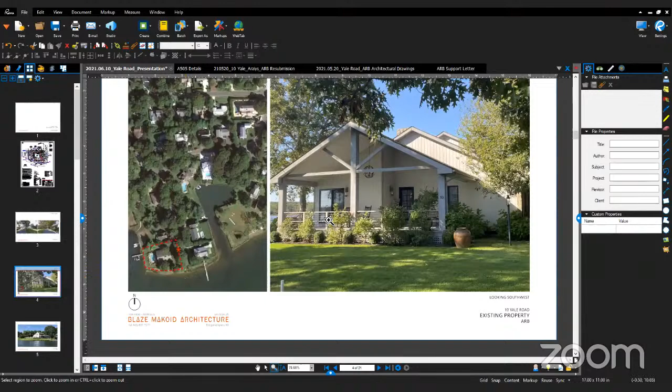And here again is the existing house from the street and the existing house from the water, which we will again see these views later on with our proposed rendering.

So here we have our proposed elevations first, just to give you an idea of the materials we'll be using. This is located in the Redwood section of Sag Harbor, and it's actually a renovation to the existing house with minor addition and roof changes.

We are utilizing the same footprint, and as you can see on our elevations, we're reworking the roof elevation. We're proposing to clad it in cedar shingle siding with accents of horizontal cedar at the entry deck, at the garage, and at the soffits of our overhangs, which we could see in the detail.

We've also proposed a light gray stucco at the base and at our fireplace masses. We're also proposing dark aluminum window frames, and we have metal accents throughout, which we'll see on our next elevation.

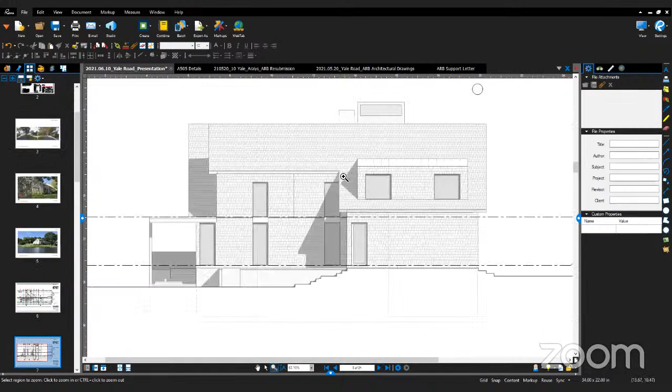So here is the north elevation facing the neighbors, and you'll again see our extensive cedar shingle, and we do have one dormer that we're treating with a standing seam metal roof here. And again, you'll notice we've got metal details between our windows to carry our dark frames in that language.

And here we are on our south elevation looking at the water. You see the extent of the cedar shingle roof again, just the larger openings of glass, which we'll see in the rendering.

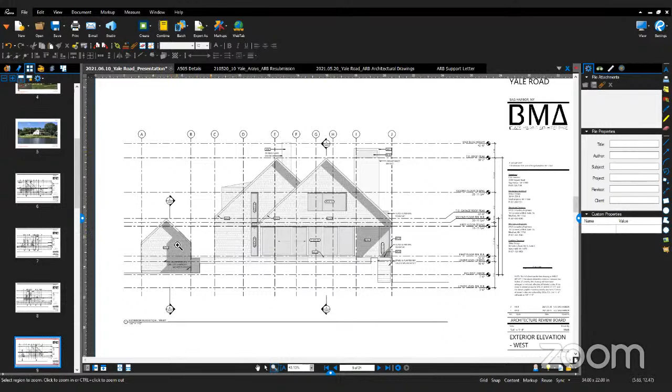And looking over the pool, also towards the water, you can again get a sense of the 3 roof peaks. The smaller structure over here is our detached garage, and we are also treating that in the same language with the cedar shingles and the same overhang details. The garage is a new structure that receives ZBA relief as well.

We've also got Steve from Araiys on to walk us through the landscape. That'd be great. Is there someone from Araiys? Yes, there is. Good evening, this is Steve Naroda with Araiys Design.

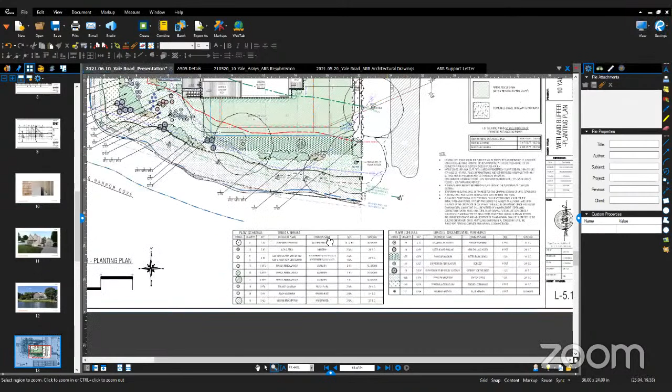Any questions from the board specifically? Yes, what is some of the plant material that's running along the street, please? What will we see from the street? Can you zoom in on that? We can see it. Well, what is that plant material? Can you zoom down to the plant list? Yeah, there you go, where's the call out here? We were going with the Ilex glabra along the street edge.

It looks like red cedar. So you've got red cedar trees, right? Is that what that symbol is? Where is it, I'm sorry? Can you zoom along the property line by the street? Yeah, that's right, I'm sorry, I apologize. We have red cedar along the street edge.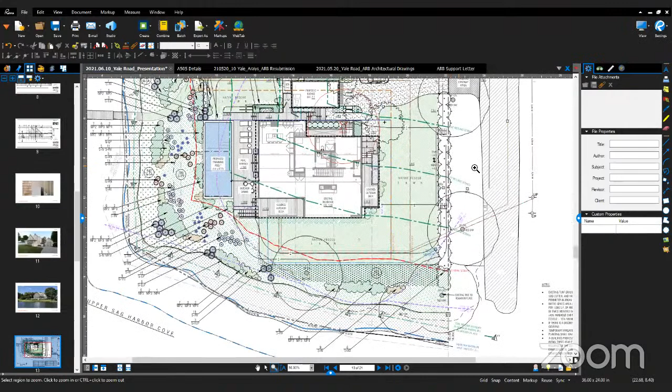And then could you discuss, do you have any landscape lighting on this site? At this point, we don't have a plan for landscape lighting. We could revisit that.

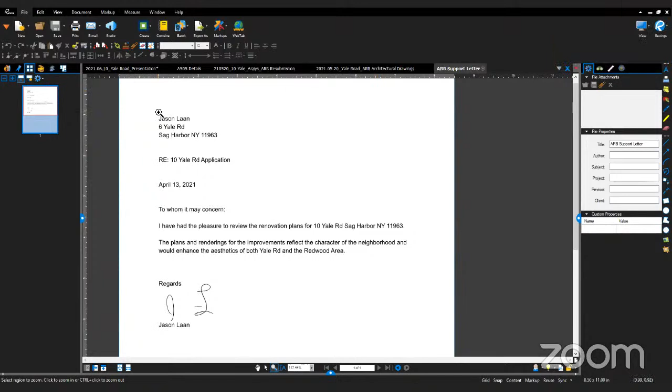This is very handy. I'm going to make a motion to close the public hearing for 10 Yale Road. Is there a second? I'll second that motion, myself and Bob. All in favor? Aye. Opposed? That's two ayes, I need another one. Aye. Okay, we're good, closing it.

Bethany, do you have comments regarding the structure, the architecture? I think the architecture blends in very well, and how they've added on to the original house is great. I love that view from the water. It's beautiful, it's magnificent, native plants everywhere. They really did a great job.

Val Florio? I like it. I liked it the first time we saw it, and here we go, ready to vote. Bob? I think it's great, I like the glass, really give it a go. Judith? It's very handsome, and I love all the native plantings. I like the flagpole too, nice touch.

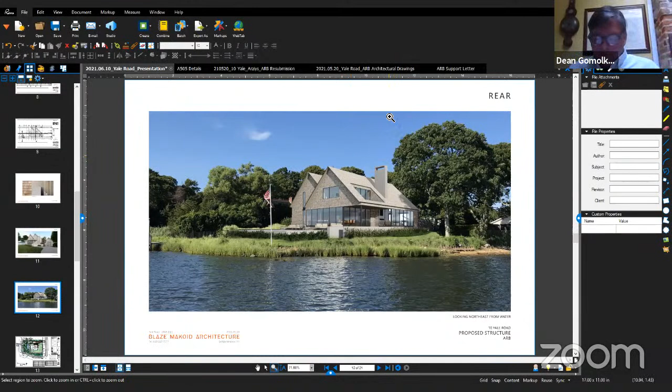Is there a motion to approve 10 Yale Road? I'll make that motion. I'll second, that's Judith and Bethany. All in favor? Aye. Opposed? Thank you for the presentation, very thorough. Thank you, appreciate it very much. Thank you, take care.

I'll make the motion to open the public hearing for 3 Brandywine Drive. Is there a second? I'll second, that was Bethany, so myself and Bethany. All in favor? Aye. Opposed? Is there an applicant for 3 Brandywine?

Yes, hi, I'm here. Can you see me? What is your name? Bonnie Hillman. Okay, please tell us about your project. Carrie, could you pull up the drawing? I'm building a residential property on the dead end street of Brandywine. Is Carrie there? Yes, I'm pulling it up now. Thank you, and what is the square footage of this home?

It's about 4,100 square feet. The building, without the garage, is 25 by 70, and with the garage is 25 by 93. Great.

I'm just waiting for her to pull that up. Do I have to share the screen? If you can, I'm just downloading what you just emailed me because you said you couldn't before, so you just have to bear with me. Okay, that was just the 3D drawings, I didn't know if that was something. Okay, so if you want to try to screen share and show what you have. No, I think I'll wait for you. So what do you want up first?

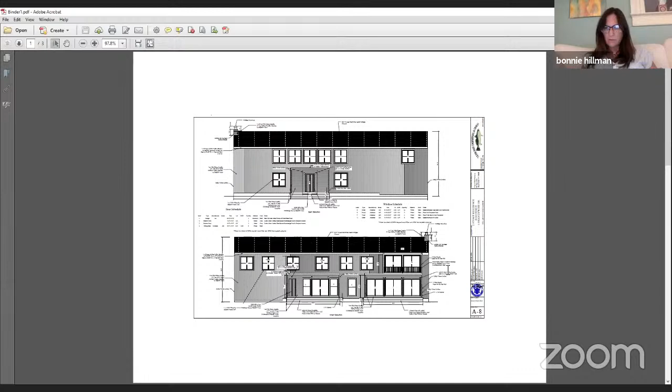Okay, so basically it's a sort of barn style, modern barn style home. It's a rectangular shape, very simple design. I have a photo of the house it's sort of designed to look like, a home that was built in Bridgehampton. It has shiplap siding that is vertical siding. This is the front entrance, and it has windows that surround the front entrance, all 6 by 6. They're black windows, and the house is more of a whitish gray color, white but with a hint of a gray undertone, and the roof is black, just a very simple, clean design.

What is the material of the roof? The roof is just asphalt, simple black. This is the back of the house, which no one would really see because there's going to be screened trees blocking the property from the street, and it faces a reserve, so no one will really see the back. There are sliding doors and a balcony with sliding doors above, and another sliding door here, with windows matching the front 6x6 windows. The chimney doesn't extend beyond the house, it's on the interior, so you only see the chimney. It's just a really simple, basic, streamlined modern style with clean, straight lines and a mitered corner.

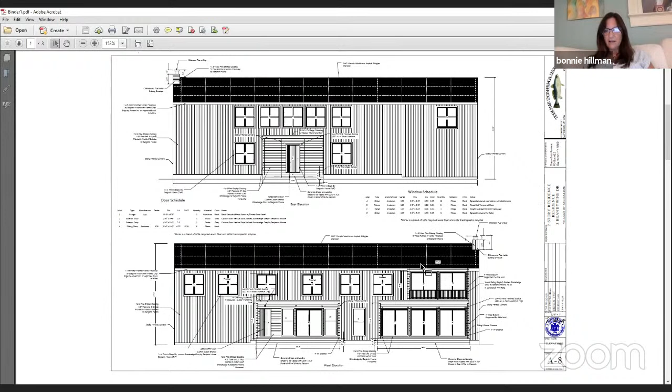Do you have detail sheets that you can share with the public?

Carrie, can you show, I just sent you an email of the 3D. Would you like detail sheets of this type of drawing or 3D? No, like the trim around the window, the entrance detail, any kind of architectural detail, yes sheet.

Carrie, I had sent that to you. There's a sheet with all the details on it. Do you have that one? Isn't this it? Oh yeah, but I also have the actual materials like the colors and things. So this sort of gives you an example of what.

Did you mean like a color drawing or this? Is this an architectural drawing showing like the eave detail, a window detail, a door detail, or the overhang detail? Any detail that we can share with the public would be helpful. Okay, sure.

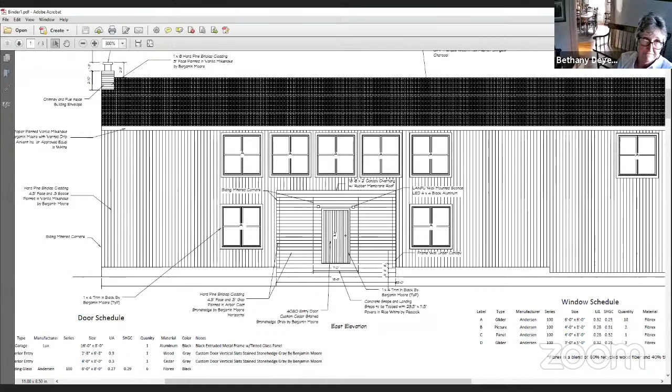Where the roof and the front wall meet, it's a very simple, modern style - there's no eave. This is the shiplap, which will be 4 inches with a quarter-inch gap. It's just shiplap siding, clear timber siding. The door again would be similar - it's out of cedar, and it's just vertical.

So that's - I'm not looking for a verbal detail. I just want an actual architectural detail. But that's that. Yeah, so this is the detail. Sorry.

Does one exist? Is there a sheet of details, like the stairs coming out of this house? This is it? Yeah, okay. Is there another page as well for the back, Carrie, that shows this? Yeah, this shows all this. It's hard to read, but it describes everything. Oh, here it is. Okay, thank you, Carrie.

So this describes - this is the drawing. This is what it will look like, and in the writing here it tells you exactly what. Okay, the description, that's all I need to know.

Are there comments from the public regarding this property? Not the property, just the architecture. Carrie, is there anyone out there that would like to? I don't see anybody, Dean.

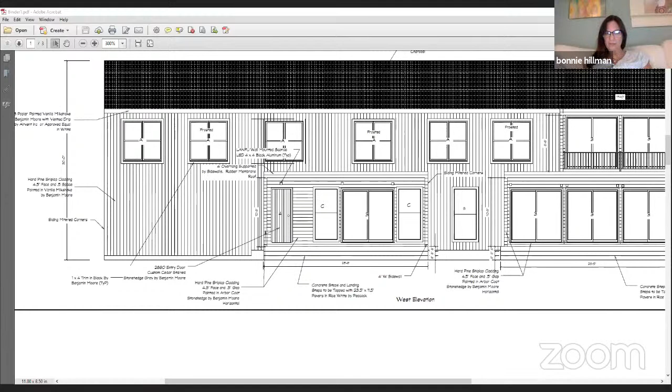Bob Adams, do you have comments? Yeah, I think it's a little too large for that spot. Okay, the lot is almost an acre, it's 0.7.

To move this project forward, I think we need to do a couple things. I think we should meet at the building department with a member or two, and we can just show you a sample of what we expect to see, as far as these small items, little details for the windows and doors, and then maybe the steps so we know how that's working. And then as far as the landscape plan, we can show a sample of what's acceptable. I think these are simple things and you'll know how to go forward. And I think that would be the easiest way to do this. And the lighting also, Dean, maybe? Yeah, we haven't seen it, right?

Yep, lighting I plan, have a drawing of the lighting and I have a picture of it as well. I'm sorry, I'm trying to help you out here and trying to get this project off the agenda, and I think this is the best way forward.

We meet at the building department. You can see sample things that we've approved as far as the amount of detail required for us to stamp something approved. Again, we're sending people out in the field to validate that we approved something and it went in the ground a certain way according to the details. These things just are not here, but these are small things. And I'd love to meet you in town.

Carrie. Okay, so I make a motion to table 3 Brandywine Drive. I'd second that motion. All in favor?

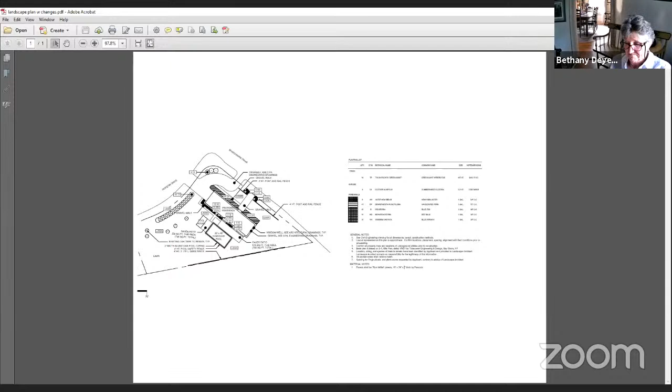4 Wildwood Drive, please. Good evening, members of the board. Alex Kriegsman, 279 Main Street, on behalf of the applicant.

Dean, I thought you were going to table me before I even got started there. Thanks for having us on tonight.

So I've just been retained and joined, and was hoping to just get a start on what the board is looking for. My understanding is that the house and the pool have been approved, that there were some concerns about the landscaping, and that we've submitted materials, but there continues to be a concern or misunderstanding about something that was submitted. So I was hoping to start off with a question as to what it is that the board's looking for from us.

Mr. Goldin, the homeowner, is on the Zoom, as is Jakes Vanderwatt, also on behalf of the applicant. All right, so basically it's a lot of housekeeping.

We approved a pool with a fence with an evergreen hedge behind it and some existing trees that were part of that situation. And then I think what happened was I was driving by looking at another application and I saw that the whole front of this property, the frontage on 2 streets, was filled in. A whole bunch of trees were cut down on the public way, and an evergreen hedge was planted, which looks completely out of character for the site.

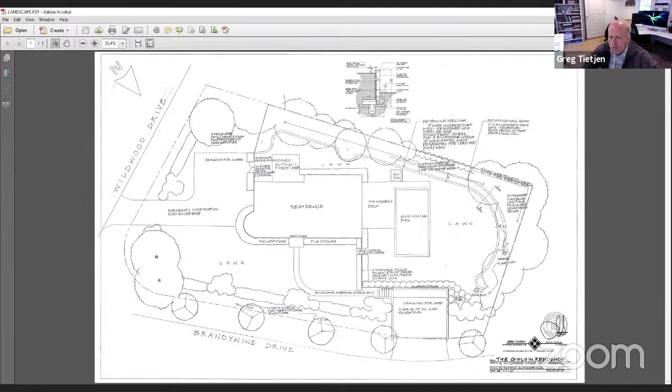This is a fairly simple project, cut and dry. We just want to clean up the house. The existing wooden shutters are deteriorated and falling apart at the sash lines, and the paint is slowly deteriorating. We'd like to replace the shutters in kind, although we'd like to change the color from black to Hearthstone gray, a little bit lighter. Across the street are some examples of the same color. We'd also like to clean up the painting of the house using Chantilly lace, very comparable to what's actually there, a slightly off white color, not too bright or stark to match anything else.

The only other thing we're looking at in this application, we like to find these things interesting sometimes. The front door is not centered on the ridge, and it's really a minor 6-inch move to just shift the existing door over to give it a little bit more street feel. That was the real intent of the request, the porch and all the things.

I'll just jump in quickly. Do you have photos? And before we get too far along, I'd like to ask Zach for some comments. Yeah, I don't understand any reasoning behind moving the door.

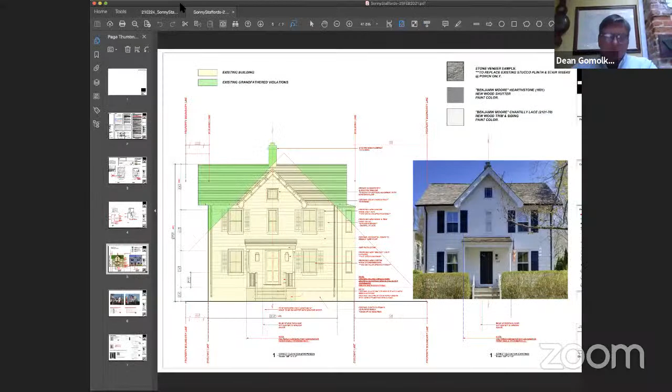Okay, do we have a photograph, Carrie, of this house? There is, page 6. Are you going to share, or do you want me to? If you have it available, you can. Let me screen share it. Thank you, thank you. Everyone can see this here?

Yes. So if you can see the red trajectory line, the door just happens to be slightly off center. It was something we've been talking about as something interesting. We would like to center it back on, if plausible. If this is detrimental to the project, obviously we're not insisting, but we do feel it would bring a lot more curb appeal and consistency to the project.

So this is a great time to break into our historian's overview of this particular site, and then we can go forward. Well, all I can say is that generally we modern people bring a contemporary sensibility to what is symmetrical and all the rest of it.

All I can tell you is the only way to determine whether someone has previously shifted that door over by 6 inches, or whether it was built that way, is something that can be determined on site. I understand that everything else about the front facade is symmetrical in terms of its fenestration, and it may strike us as being a little odd that the door is off. Frankly, those of us who love old houses kind of enjoy those details.

So in and of itself, if it's simply a question of wanting to move it 6 inches to make it all symmetrical, I don't understand the rationale for that. Understood, understood, I think we just need to look at it.

I'm fretting over this constant business of these paired lighting fixtures at every doorway. Is there a lack of light there, or what's the story? Because the existing fixture is dimly lit. However, as time has gone on and the client has been there a while, we agreed that moving the door is not necessary, so it doesn't need to be. However, since it was in this application, I had to bring it up just for context.

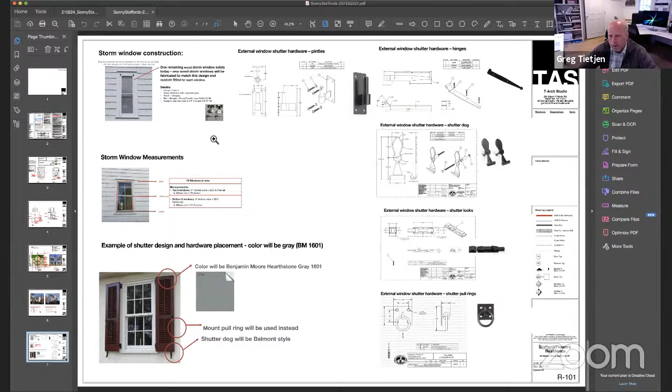I also wanted to know about the shutter hardware specifications, and wanted to make sure it wasn't too elaborate. No, we're going with fairly traditional, fairly calm hardware. Some people around town put on these absolutely garish hardware on their shutters, but this looks okay. I'm trying to keep it like an original carriage house or horse hitching barn kind of thing—really simple, small, with a couple lock sets.

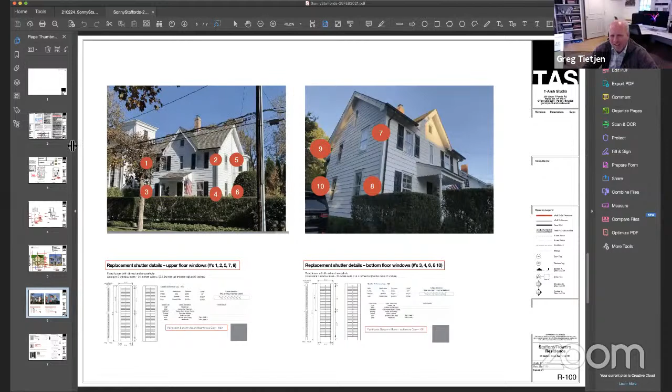Val Florio: I'm good with it. I actually like the little quirk, it's one of those old house things. Now you're reassured, everyone—no, it was probably an afterthought, or someone was drinking a little too much beer on the job that day.

Bob: comments? I think it's pretty good. Now, are they going to use the lights as proposed? No, we're going to leave the existing light fixture where it is. We're not going to add the double light fixture. It looks good. I think we hit everywhere.

Bethany: there's not much to really talk about until we actually have it as a proposal, right? This is just discussion. Basically the most discussion was about the door, so we're good to go now, I would think. We're ready for real drawings.

Can I ask a question? Thank you, sir. Oh, sorry. Yeah, very, very clear presentation. Thank you. Yep, that was good.

Sonny, do you want to mention anything? I'm just the homeowner—just a question on the door. If we take that out of consideration, can that just be done, and we'll just appreciate the quirk with no further discussion on that? Will there be an issue with the project? No, I think it's clear cut.

We just need you to be on new business and make whatever clarifications you need on this drawing, i.e. taking those lights out, whatever you have to do. But I think you have a favorable response from the board.